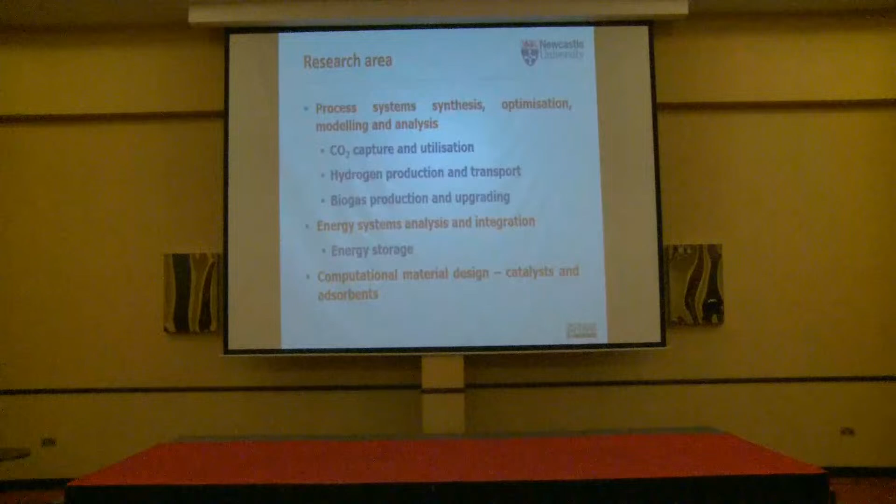So today I'm going to talk you through a background, highlight some of the hydrogen storage options, discussions around ammonia as a hydrogen carrier, and of course some model developments and results that we've done. And I can also give you some highlights on the R&D landscape in this area.

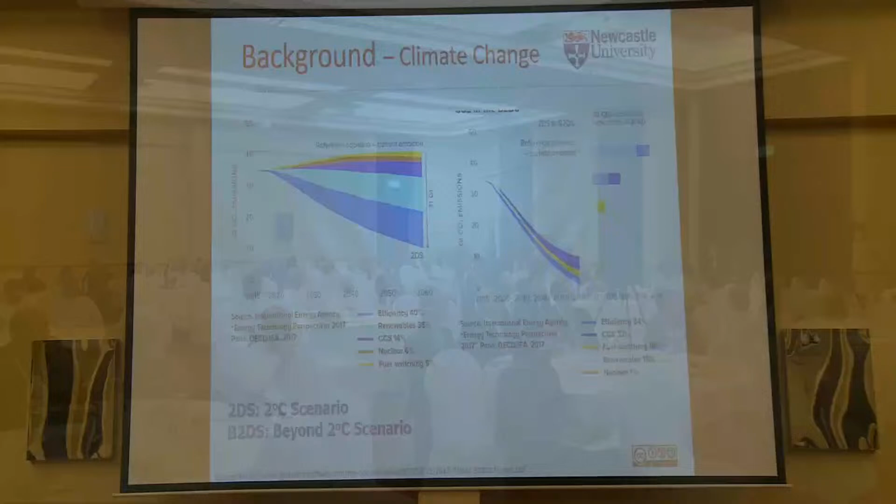The Blue Map scenario looks at two scenarios. The first one being the 2-degree scenario, which is the sort of technology options that can be deployed and to what extent in decarbonizing, in achieving the 2-degree target. The Paris Agreement looks at beyond 2 degrees.

And for beyond 2 degrees scenario, the estimate is that fuel switching, which will include replacing fossil fuels that is currently used across the various sectors with a low-carbon fuel type. So you can see that fuel switching is expected to contribute as much as 18% in achieving decarbonization targets between now and 2060.

And then we talk about hydrogen. Hydrogen has become very popular because more and more we have many countries keying into the reality that hydrogen could be a vital fuel option for meeting decarbonization targets. Following up with that, many countries now have hydrogen strategy in place, including Oman.

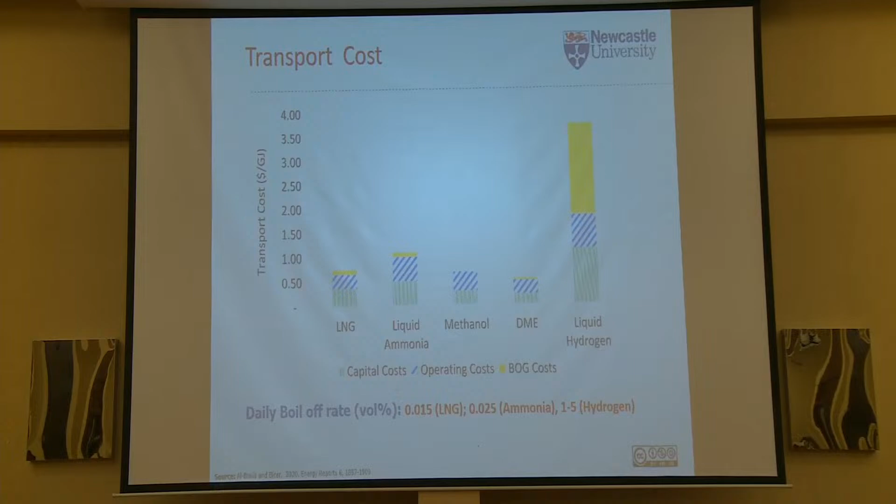And the reason for that is mainly down to the very high boil-off rate that is associated with liquid hydrogen. So what that essentially means is that when you are transporting liquid hydrogen, because hydrogen is not very stable, a good portion of it is likely to evaporate in port. And so you have to reliquify that component. You are not going to let it go. You are going to reliquify that component and then turn it back to liquid, essentially.

If you compare the boil-off rate that is associated with, say, LNG, ammonia, and hydrogen, you can see in volume percent, that of LNG is very tiny, that of ammonia also tiny, but that of hydrogen could be as high as 5 volume percent, which is substantial. So this is essentially what is driving the cost that is associated with hydrogen transport.

Obviously, the other fact which has not been highlighted here is that hydrogen has very, very tiny volumetric density, and because of that, if you were to transport hydrogen with the same amount of energy as, say, diesel, you will require a significantly bigger shipping vessel to be able to transport them.

Not sure, this is not working very well.

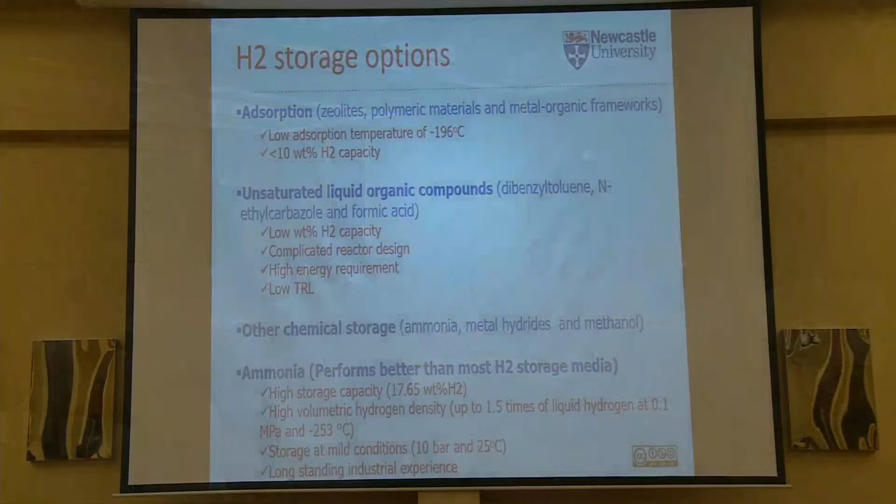So in terms of hydrogen storage options, they are broadly classified, and you have the adsorbent kind of materials. The adsorbent materials are mostly upcoming at the moment, but the best of them still operate at very low temperature, which poses some problems, but it's something to think about if you have an interest in hydrogen storage and transport.

The other class of materials include the unsaturated liquid organic compounds like formic acid and the rest of them. The problem with this class of storage materials is that, for the best of them, the hydrogen storage capacity is relatively low, less than 10 weight%. And of course, the reactors are complicated to design and they have high energy requirements, etc.

Then you have chemical storage that includes ammonia, metal hydrides, and methanol. Ammonia is very popular for this application because ammonia has high hydrogen storage capacity. Of course, it also has high volumetric hydrogen density, which is around 1.5 times when you compare it to hydrogen itself. We can also do that at relatively milder conditions. So we can transport ammonia at, say, pressures as low as 10 bar. And then lastly, there is a lot of experience with transporting ammonia in the industry.

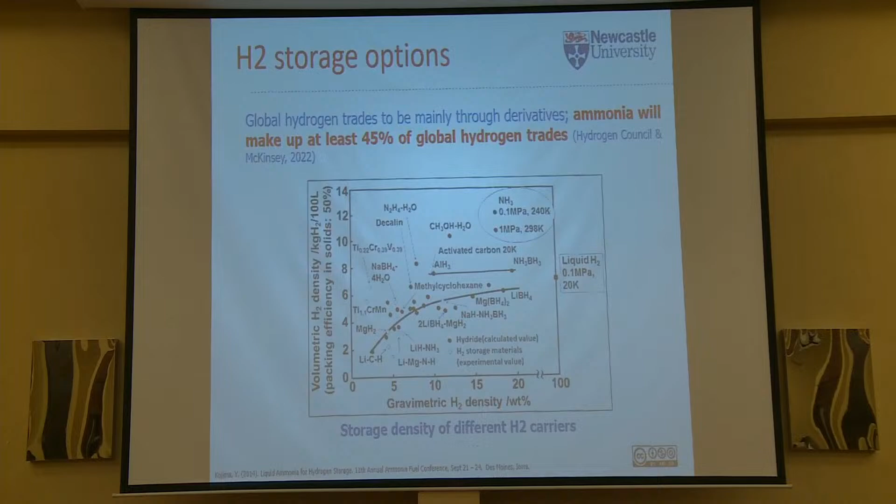Okay, so still talking about that, it is believed that global hydrogen trade is going to be mainly through derivatives. In other words, the derivatives here being the storage materials. And ammonia is expected to make up at least 45% of global hydrogen trade. This is the McKinsey report 2022. If you look at this figure here, you would find that if you compare ammonia performance in terms of hydrogen density with a good number of storage materials, you can see that ammonia is way ahead of others.

When I was also reading up last night, your country, Oman, also exports ammonia, and the transport vessels for doing so are all in place. So you are not going to be inventing new technologies to be able to transport ammonia.

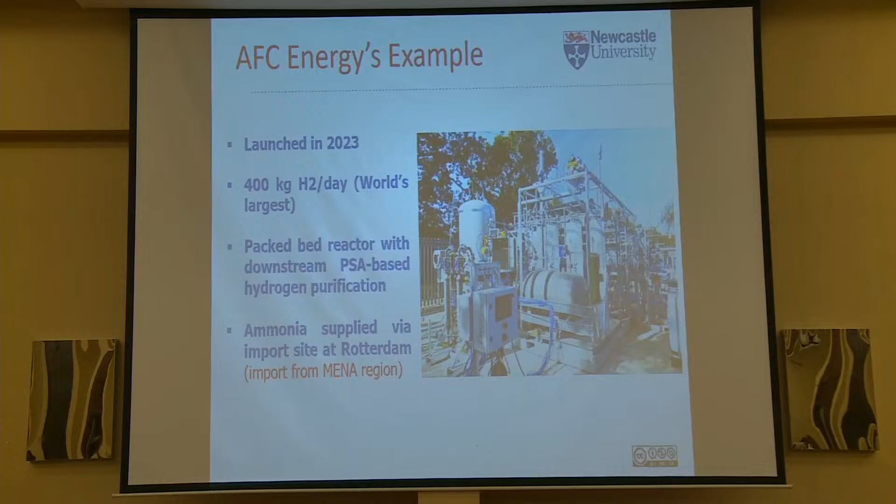This presentation is about a different way of doing that, which is a decentralized model. And this is particularly suitable for industrial clusters. Industrial clusters means that you have all the big companies in one place, most times, as is the case in the UK, very close to the port or not very far away from the port. So the idea is that the ammonia that you are going to be receiving, instead of cracking it centrally and then supplying hydrogen, we could essentially have smaller cracking systems. So if we have 5 companies, you will locate a cracking system within each of their facilities.

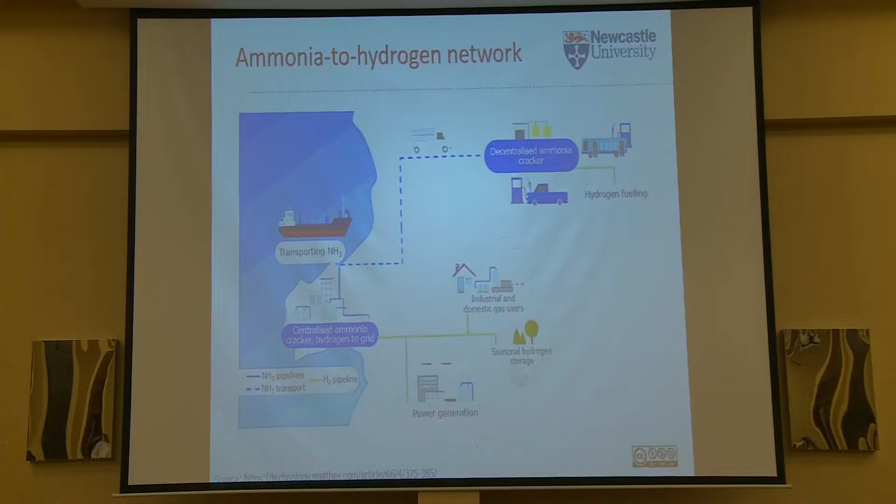This idea is beneficial for a number of reasons. One of them is that most of the heavy industries that we target in these applications are already industries that produce a lot of waste heat. So imagine, for instance, a steel complex.

Imagine, for instance, a refinery. These are companies that traditionally produce a lot of waste heat. So if we locate an ammonia cracking system within their facilities, that means there will be increased potential for heat integration, which could help minimize the primary energy use.

The other point is flexibility, and flexibility is very important because at the start of technology deployment, not everybody is going to sign up for it. So let us say you are targeting an industrial cluster that has 10 companies, but at the start of the project, you find that only one company has come forward to take up this technology.

So look at the first scenario where you have a massive central system to supply this hydrogen. But then the central cracking facility that you would build at the start of the project—are you going to build it for 10 companies? That wouldn't make sense, since only one company is willing to take hydrogen from you.

The other interesting option is that if you build a smaller pilot system, that would enable you to phase the rollout, which is very likely what will be the case in the future. So if you have 10 companies and the first signs up in year one, and after 2-3 years another signs up, you can gradually roll them out in phases without needing to rebuild the plant.

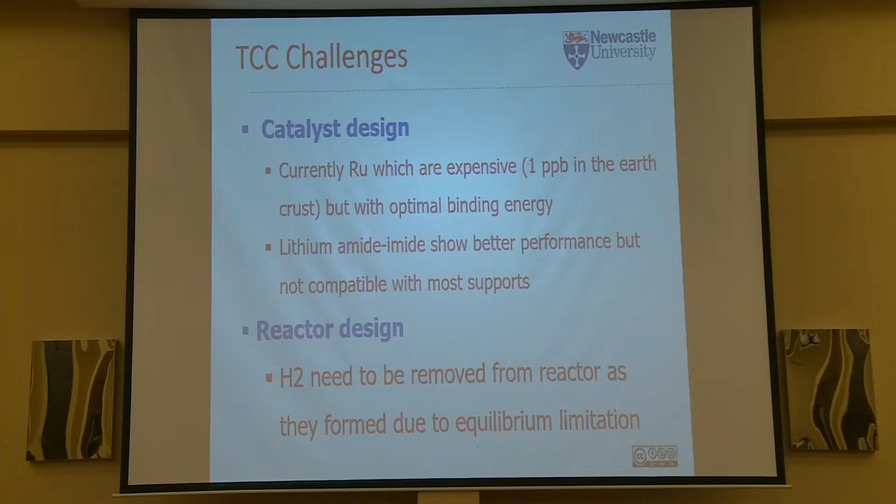A good part of our research, as I've mentioned, involves using computational methods to design catalysts. We've used this application to develop a simple methodology that we can use to assess different catalysts. What we do is simply estimate the energy barrier, because for a start, a key criteria for assessing catalyst suitability for us is the energy barrier associated with the catalyst in ammonia cracking.

So the method we are using at the moment estimates the transition state associated with a specific catalyst in this process. The transition state looks like this for non-chemical engineers, and with the transition state we can estimate the activation energy. If we can do that for different catalysts, we can then use that as a basis to compare which one is acceptable or not.

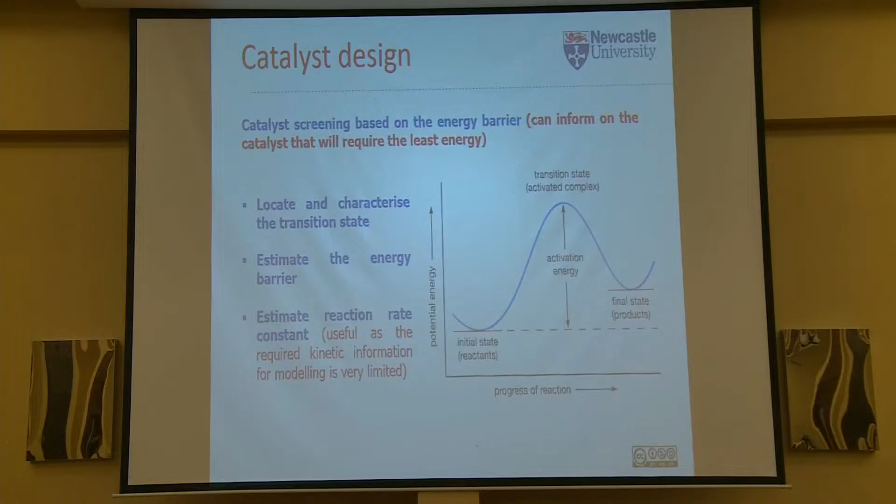Of course, after doing this, it still needs to go forward to the lab, where you will then synthesize the catalyst and test it for different properties. But this helps you make some quick decisions without needing to go to the lab from day one.

And this is what the methodology looks like in principle, how it works. We work out the geometry - this is done at molecular scale. We work out the geometry of the scan, do some potential energy surface scan, etc. Based on that, we're able to identify and optimize the transition state associated with the particular system. This method of modeling is based on density functional theory.

Currently we are using a software called ADF. There are softwares that you can use to do this that are completely free, which you can download and use straight from the internet.

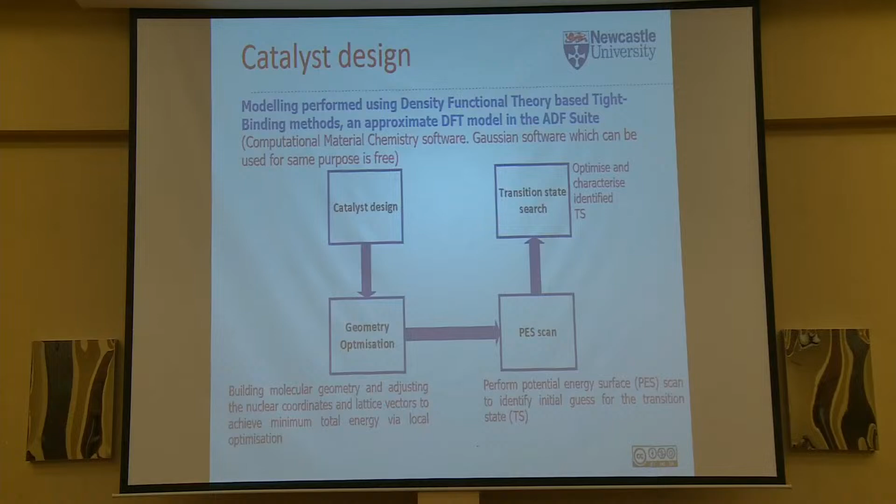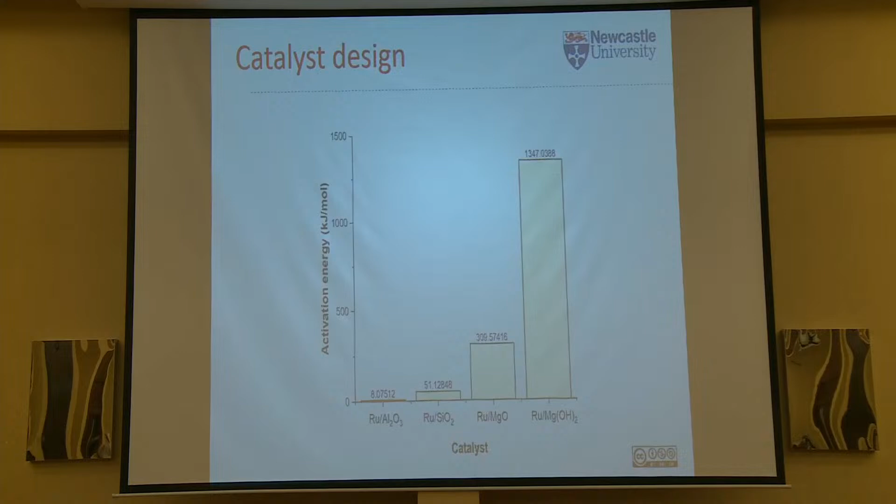And the ruthenium-based catalyst in this particular example we can then go ahead to synthesize in the lab. Now, having established this method, what we are doing currently is applying it to other non-noble metal catalysts.

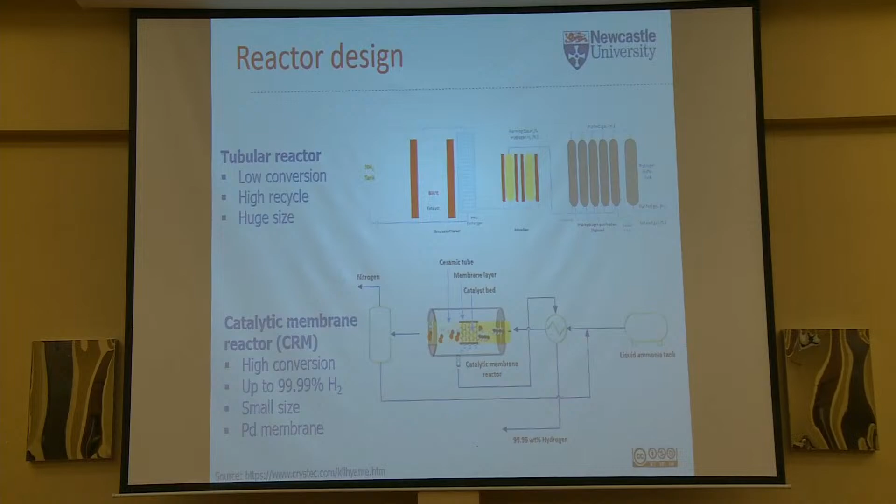The other thing that we looked at is onboard application of ammonia cracking. As I was explaining earlier, carrying hydrogen onboard is quite a challenge, and we are looking at replacing that. We've done some analysis.

There's quite a lot of study in this area, and everybody is saying it's focused mostly on engine development. So what our studies have done is look at the storage capacities for that. We used the A380, the very big Airbus aircraft, to do this analysis and try to estimate what will be required.

One of the things we found is that in terms of volume ratio, you're looking at around 2.65 compared to the Jet A fuels currently in use. What this means in principle is that the volume of fuel you carry on board when using traditional fuel, you will need around 2.65 times that volume if you're going to replace it with ammonia.

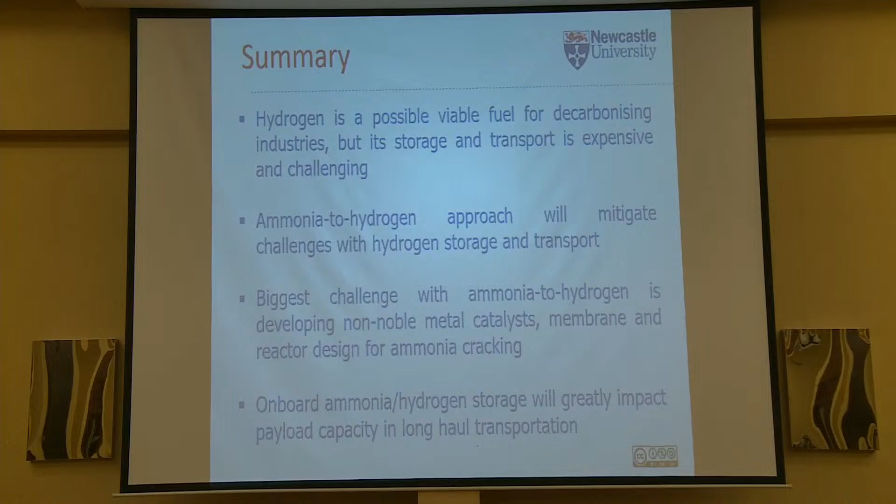Hydrogen is possibly viable for decarbonizing industries. The ammonia to hydrogen approach is essentially important to help mitigate the challenges with hydrogen transport and storage. But the biggest challenge remains developing non-noble metal catalysts, which is what we're doing at the moment, along with developing novel membrane reactor designs to support ammonia cracking.

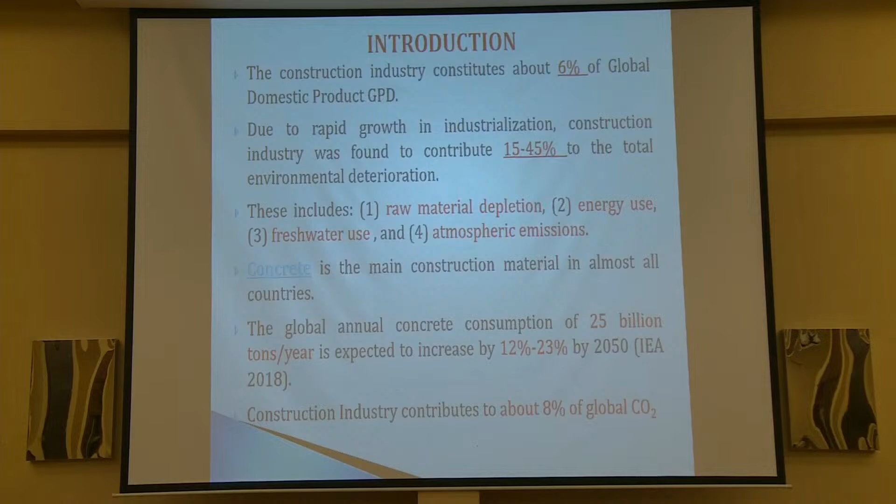The greenhouse gases are generating at an alarming rate, and this is causing a problem, causing global warming, and the global warming will cause the increase of natural disasters. We have seen in recent years the magnitude and the frequency of cyclones has increased in Oman. From 2007 to 2020, we had about 4 cyclones which hit the coast of Oman. And the main contributor, what they are saying, is global warming.

And also we have the increase in frequency of the flash floods. And we have seen the wadis and the flash floods causing destruction to the infrastructure and also the loss of lives and economy. And therefore, we use concrete in Oman for the buildings. The main material we use is concrete.

And worldwide, the annual concrete consumption is 25 billion tons per year. And this is expected to increase by 12 to 23% by 2050. And also the construction industry is the main contributor to the CO2 emission, CO2 footprints, which accounts for about 8% of the global CO2 emission.

And therefore, we need to find alternative materials to be used, either as a replacement of sand, of aggregates, these are the ingredient materials, or as a replacement or supplementary materials in the production of cement. We need to reduce the amount of cement we are using in the construction industry.

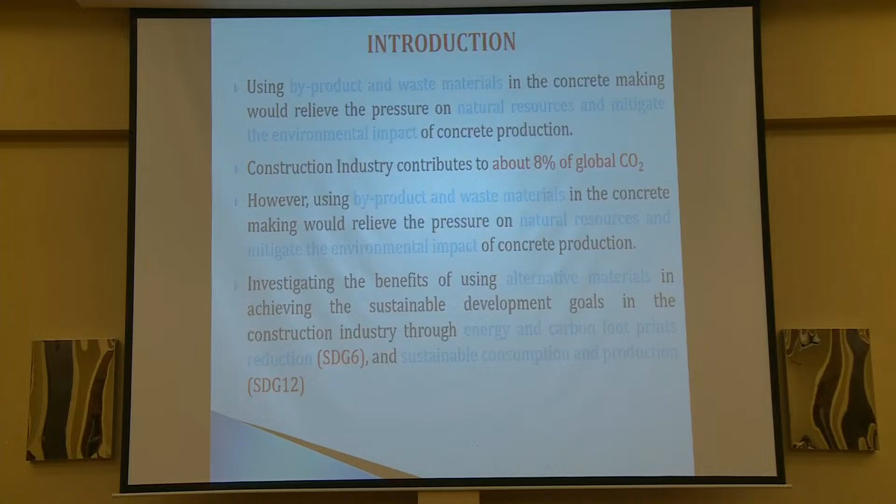And therefore, we need to find alternative ways, alternative sources. And one of these ways is the use of waste and industrial byproducts. Waste generated from industry, the byproducts which are generated, also have properties similar to either the sand or the cement, and therefore it has potential to be used as a construction material.

And therefore it will reduce the consumption of our natural resources, and also, if we use it as cement replacement or in the production of cement, it can contribute to reduction in the CO2 footprints.

When we investigate the benefits of using alternative materials in achieving the Sustainable Development Goals, we know that the United Nations has launched the United Nations Sustainable Development Goals, and there are 17 goals for sustainable development. And when we use alternative materials in reducing the energy used and carbon footprints, we fulfill goal number 6 in the United Nations goals.

And when we use it for sustainable consumption and in the production of concrete or mortars, we fulfill goal number 12 of the United Nations. This one, the Sustainable Development Goals.

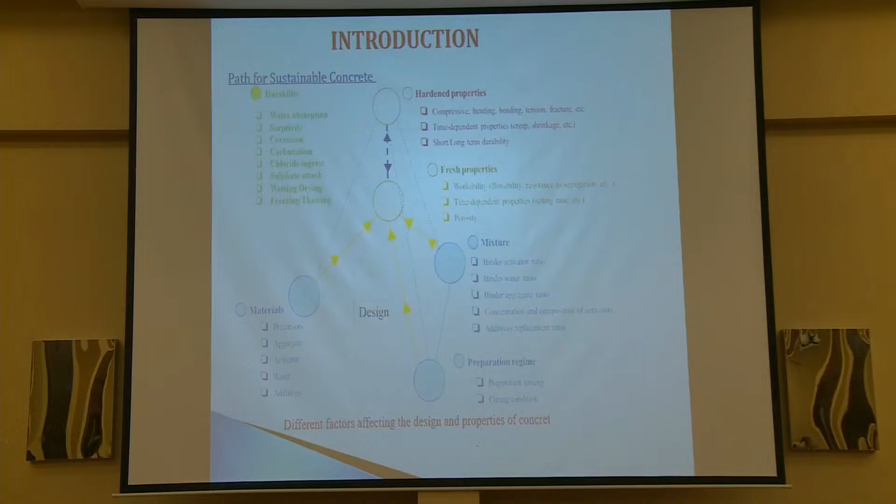And also one of the important parameters is the durability. Sometimes we concentrate on the mechanical properties and we forget the durability of concrete. And this can be measured by so many tests, by the water permeability. We need to see the carbonation. We need to see the chloride ingress. We need to see also the drying and wetting properties. And if we are in a cold country, we need to know also the freezing and thawing behavior. So all these are important parameters and factors we need to consider when we produce the concrete.

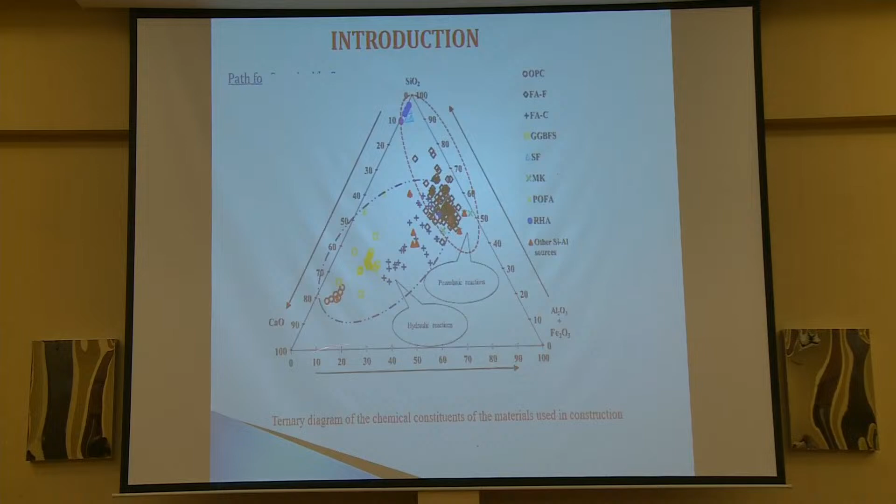So chemically, when we classify these materials, we need to take care of these substances. These are the 4 main oxides that we need to consider. Of course, we have other elements that we need to consider. For example, if the material is rich in sodium oxide or potassium oxide, this is not good for concrete. These are called alkalis, and they will activate the alkali silica reaction, and therefore the concrete will deteriorate. It will crack after some period of time. And therefore we need to be careful. We need to study this material in depth.

So actually we use different types of waste materials. The use of waste materials in concrete as sustainable is not a new thing. We use, for example, fly ash. Fly ash is a waste material. We use silica fume. Silica fume is used in the production of high-performance concrete. Silica fume is considered a waste material, but now it is used in the construction industry. We also use granulated blast furnace slag, and this is also an important material. So the use of waste material is not a new issue. It is an old issue.

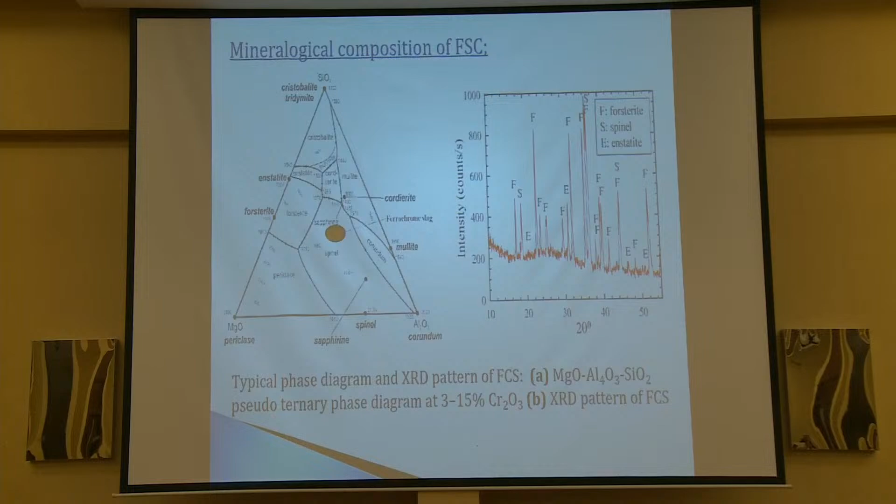But this is not always a disadvantage, because material with high thermal conductivity can be used in mass concreting. For example, in underwater concreting, in bridge abutments, in other large mass concreting areas. And this will control the hydration process, because concrete production is associated with liberation of heat, and sometimes the heat could be intense, and this could produce thermal cracks in the concrete.

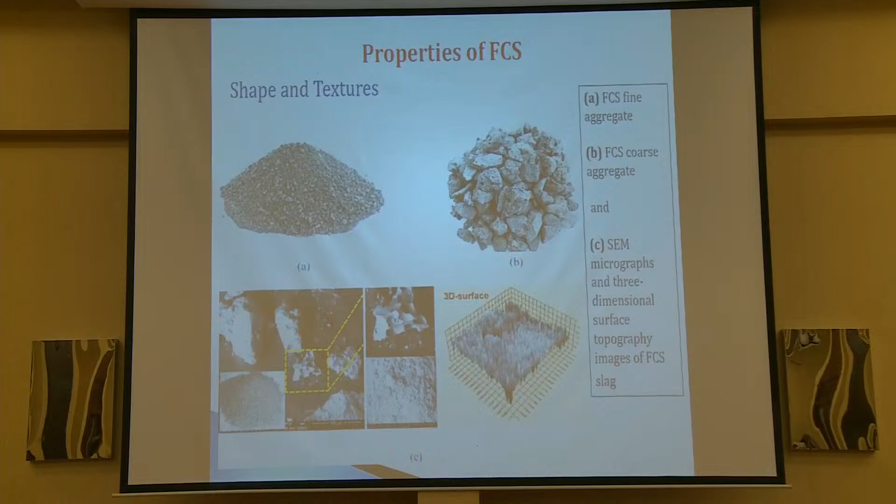So these are the properties of the ferrochrome slag, and you can see the ferrochrome slag is similar to our normal aggregates. The properties are quite similar, and therefore we use it mostly as a replacement of aggregates, not a replacement of cement. And these are some studies; of course, I talked about this, about the chemical composition.

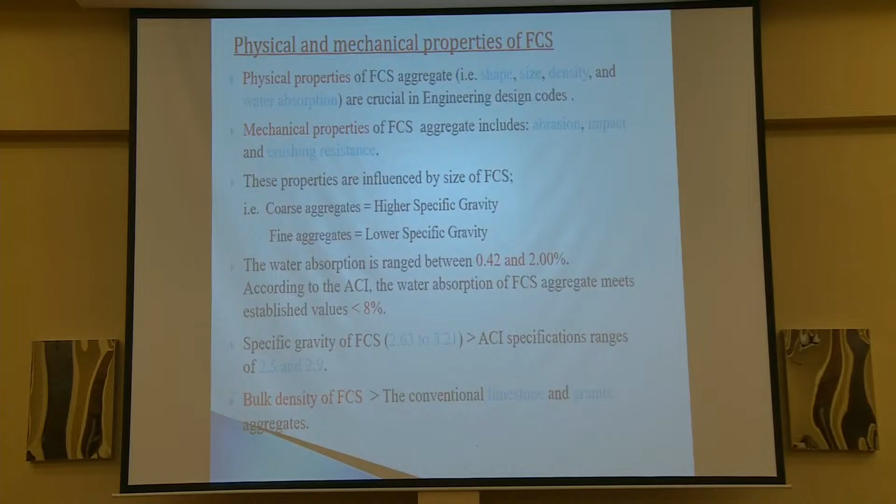And therefore, we need to study the physical properties of the material. The physical properties include the fineness, specific gravity, water absorption. All these are important characteristics we need to consider. And we find that the water absorption ranges between 0.42 and 2%, which is almost comparable to aggregates, and also the specific gravity is similar to aggregates, ranging from 2.63 to 3.21.

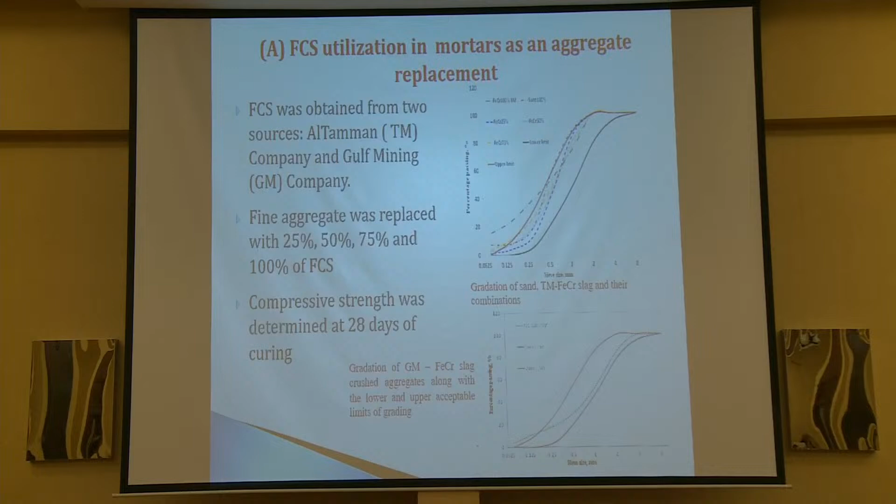And we studied two types of ferrochrome slag, from two different factories. And this is the grading. You also need to know the grading. The grading is very important, and a poorly graded material will affect the concrete properties.

And these are the results of our study in mortars, of course. In the first material, we noticed that when we increase the percentage of the slag, the compressive strength is reduced. And this is due to the poor grading of the material. We used the material as received. And for the other source, we find that there is an improvement in the compressive strength.

And also, in another study, we studied the behavior. We added only 20% as the sand replacement, and we find that there is good improvement in the compressive strength. And also, there is a great result, which is very important. If we have shrinkage in concrete, it will result in cracks, and therefore the shrinkage is reducing as a result of increasing the percentage of ferrochrome slag. And also, as I said, the thermal conductivity will increase further.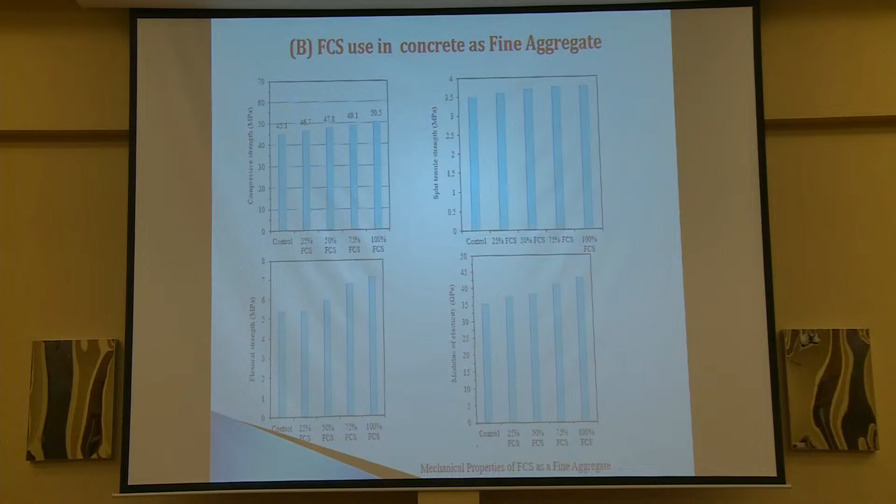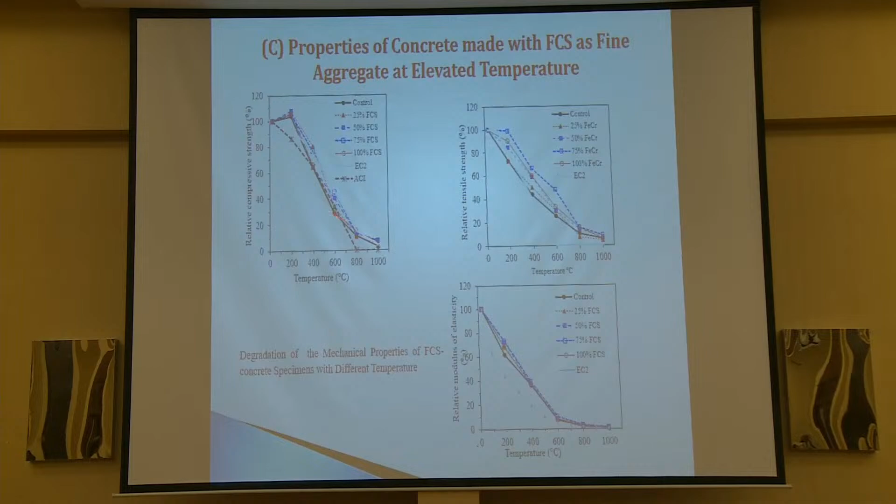And then we studied the behavior of the material at elevated temperatures, at high temperatures, and we heated the specimens up to 1,000 degrees Celsius. And also we find that the behavior is comparable to the normal concrete, and we compared the degradation of this material with the degradation of concrete properties for EC2, European Code 2, and also the American Concrete Institute. And we found there is a good agreement, matching the degradation properties of this material.

And then we used it in the application in pervious concrete. Pervious concrete has a very great infiltration rate, and it can be used in road applications. So we find that the density is okay, the compressive strength is good, comparable to the control mixture. And also we find that the infiltration rate is increasing with the increase of the ferrochrome content in the mix.

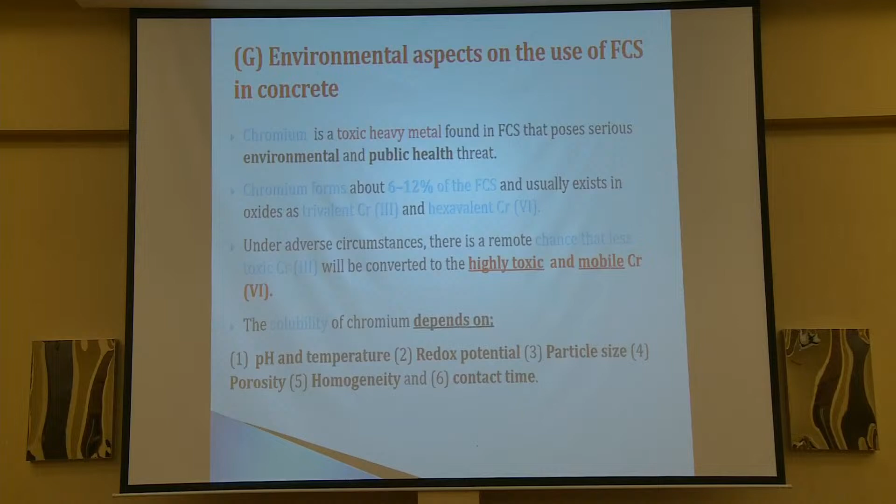Now here we need to make sure that when we use such types of materials, we conduct the environmental impact assessment. And also we need to conduct what we call leachate tests in order to make sure that the material will not cause any harm to the environment or to the people.

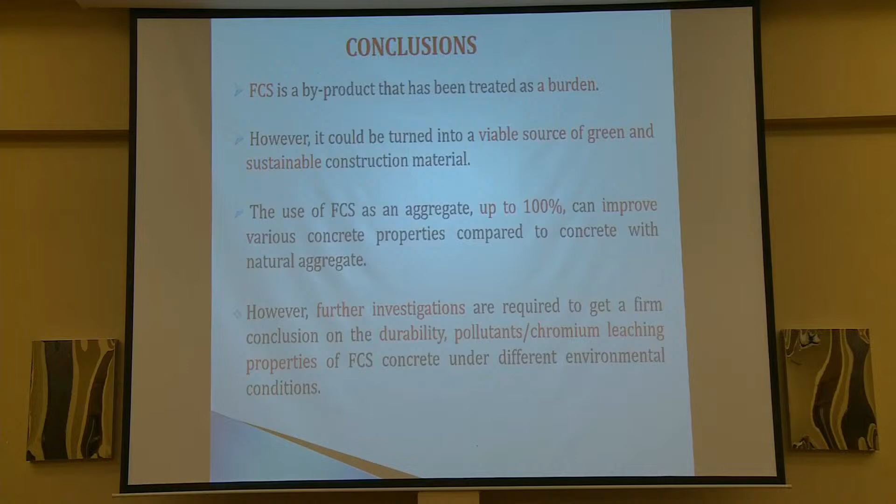Now my conclusion is that we can use industrial byproducts as a sustainable material in the construction industry, but we need further investigation regarding the durability of these materials. It's not well studied. We need also to carry out the environmental impact assessment. This is very important. And also we need to develop specifications for the designers. Designers will be reluctant to use this material without any specifications. And therefore, it is very important to have specifications in order to make sure that the material can be used safely in the industry. This is my presentation.

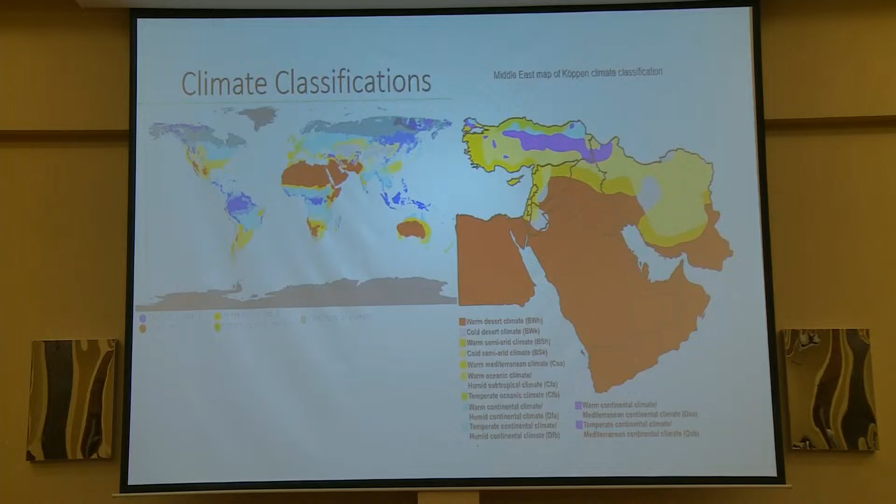Now, if you look at the energy consumption, or the CO2 emission per capita worldwide, and compare it to that area I have shown you already, you will find that Oman falls in the 10th rank, and 5th in the area, in the Middle East.

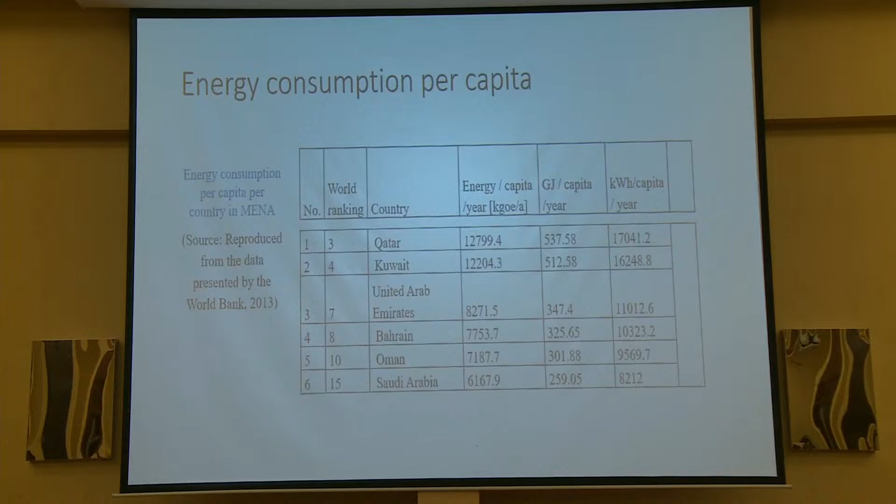We'll go through the construction history in Oman, which led to that increase of energy consumption, and the climate condition of Oman.

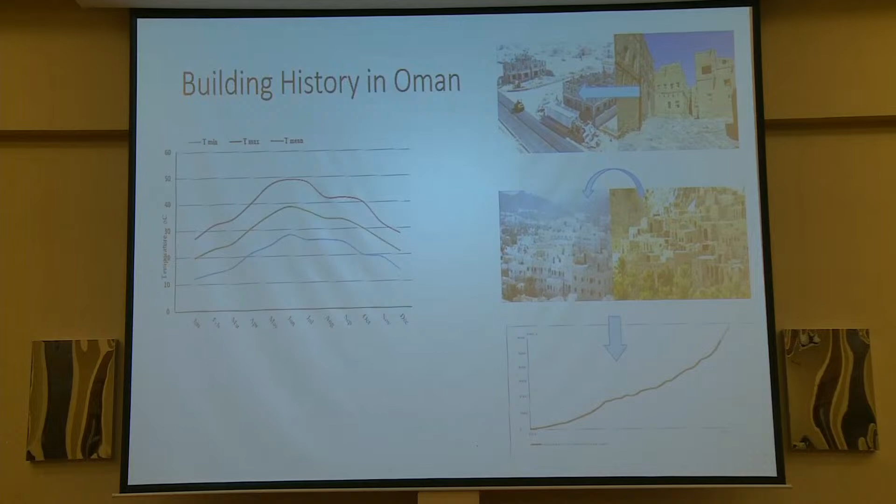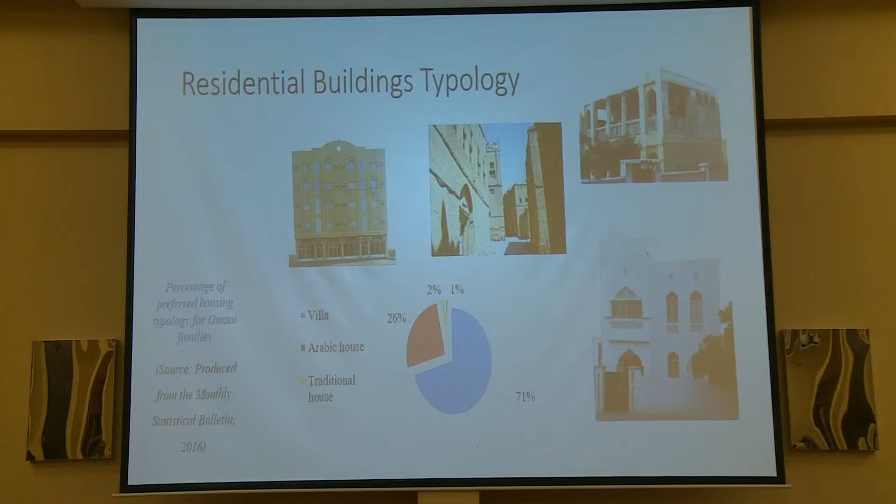We will look through the typology of buildings in Oman. Researchers have classified them into main categories: Arabic house, which is this one; villa, which is another type; and houses; and apartments. The population of Oman prefers to have villas as their type of residence.

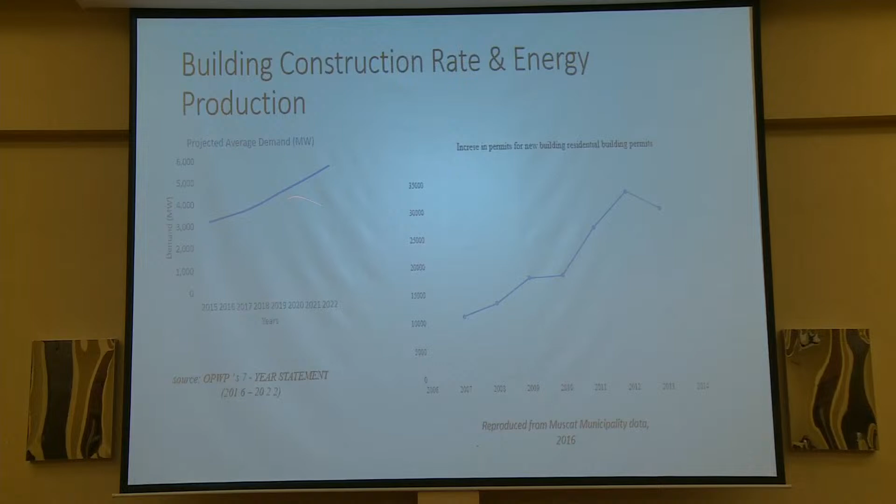These two graphs show you the increase - let me go back to this one. It shows the increase of the permits for building requirements from 2007 until 2014. We can see that the number of building constructions is increasing, and this is the required increase in electricity developed in the country.

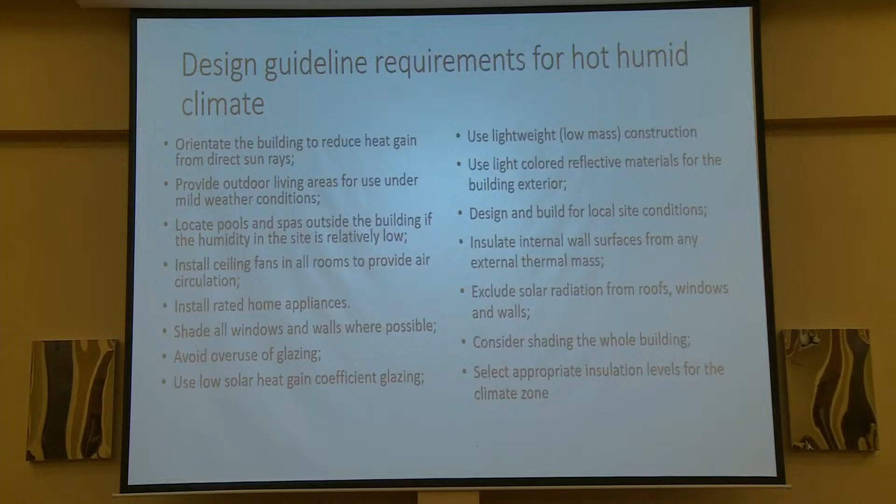That was very important because most green buildings that use photovoltaic panels sometimes deliver more energy than what they need, so that extra energy should not be wasted. It can be fed to the grid, and during low energy production, this building can extract energy or electricity from the grid.

Very interesting, when we designed this building, we designed it to be zero energy consumption. But during operation, we found that this building is positive energy consumption, meaning it delivers more energy than it consumes. In fact, it can produce double the energy it uses. So there is a promising industry here for green buildings if it is considered.

Normally, scientists believe that for 2 to 3 floors, it's easy to supply, especially in a climate like Oman's, the whole inner building with photovoltaic panels on top. But some countries, like Singapore, the National University of Singapore has constructed a 5-story building that can operate only with photovoltaics, without any external energy need.